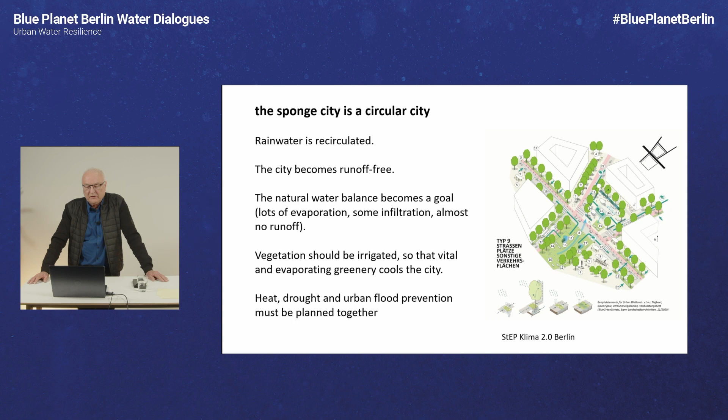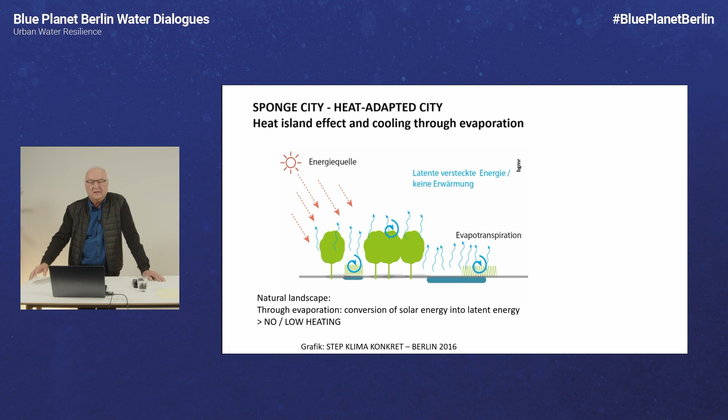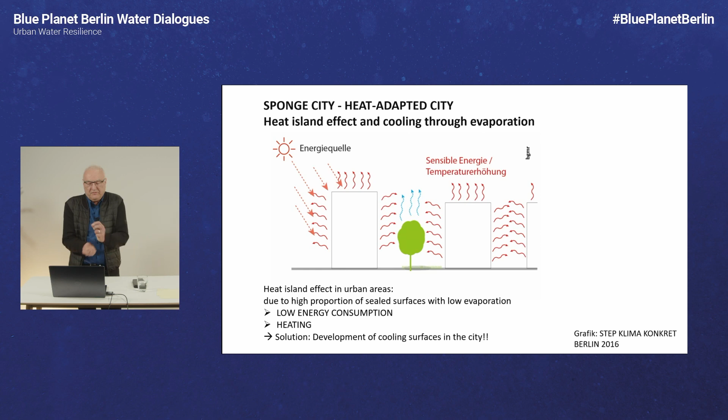Why? In the natural landscape, we have much evaporation. We have the conversion of solar energy into latent energy, and the result is low heating. But when we come to the cities, we have the heat island effects, and we have to cool through evaporation. Heat islands occur in areas with a high proportion of sealed surfaces with low evaporation, so we have to change it. How to change it?

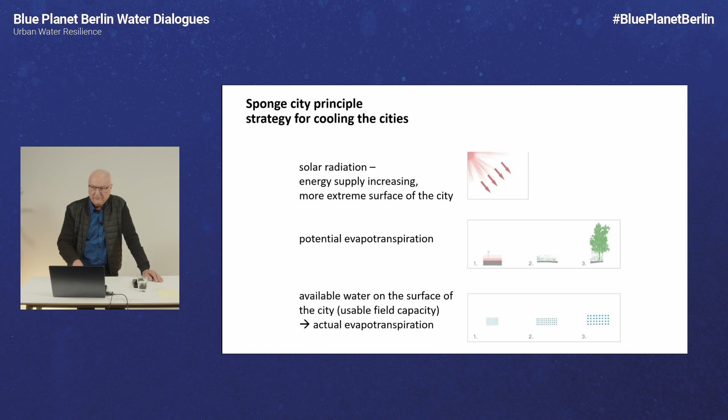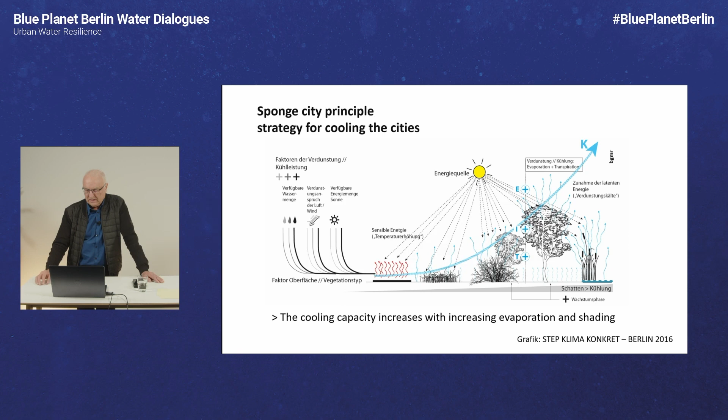The main strategy is evapotranspiration, but we need water to do this, especially in summer times. So we have to combine heat and water management. The cooling capacity increases with increasing evaporation and shading, and the nature-based solution is vegetation and water coming together, like this picture shows us.

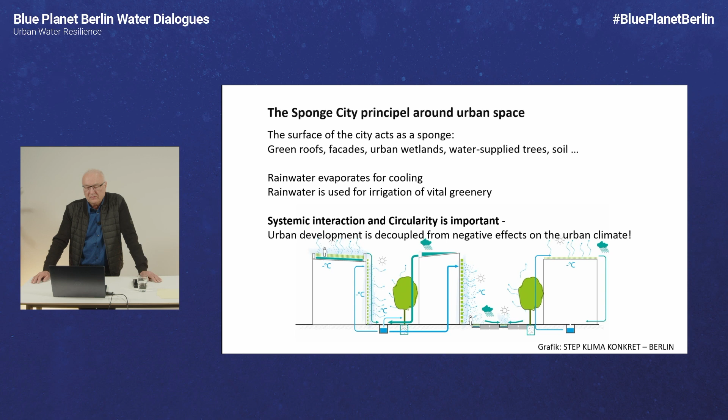urban cities. The sponge city principle for urban spaces is that the surface of the city acts as a sponge. Green roofs, facades, urban wetlands, water-supplied trees, soil. Rainwater evaporates for cooling. Rainwater is used for irrigation of vital greenery. This is a very systemic interaction and circularity, and this is very important to think about in this context.

Sponge cities, the challenge for Berlin. Berlin is a water-poor city. Precipitation is less than 600 millimeters a year. We have the river flow. When you look at other cities like Cologne, Dresden, Hamburg, Frankfurt, they have very high river flow. Berlin, only low.

This is a challenge for the city's water management because in Berlin we have a semi-closed water cycle. And the condition and quality of the water is very important for this cycle.

95% of the drinking water is produced in the urban areas of Berlin. Most of it is bank filtrate. The drinking water production and the wastewater disposal are in one area, in one water system. So we have to manage it together in a very closed connection, because we also have sewerage overflows in the city when we have rainy days like today.

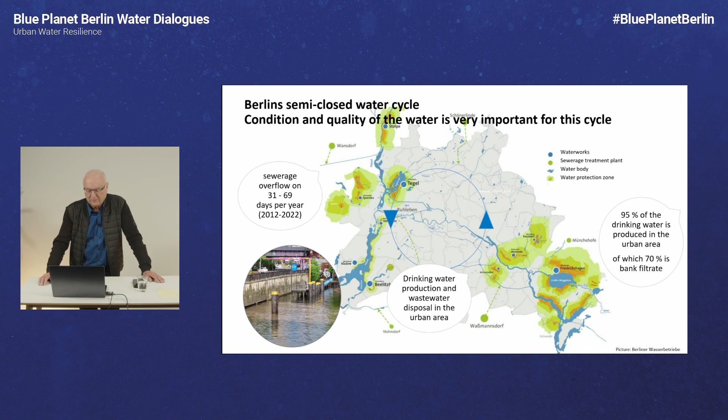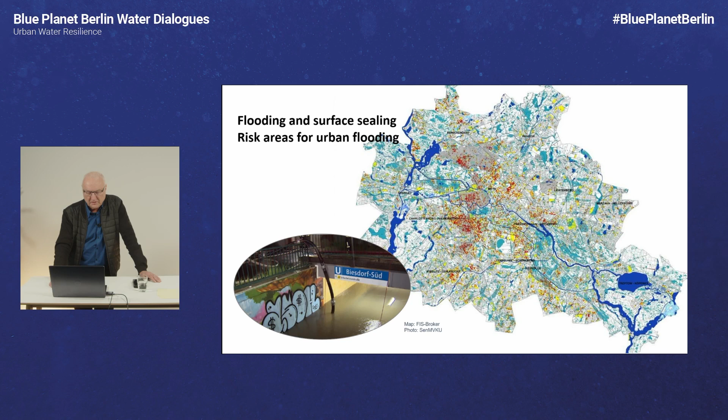So we have another job to do, we have another challenge: the flooding and surface sealing. We have risk areas for urban flooding all over the city, especially where many people are living. And we have infrastructure, like the picture shows us, with problems. So this is one side, too much water.

The other side is less water, with effects of drought and dryness. A good third of small water bodies, very important for biodiversity, have dried up in the last years. The trees need water, but they are damaged because of the drought and dryness. And the groundwater reservoirs are not fully replenished after the last drought years.

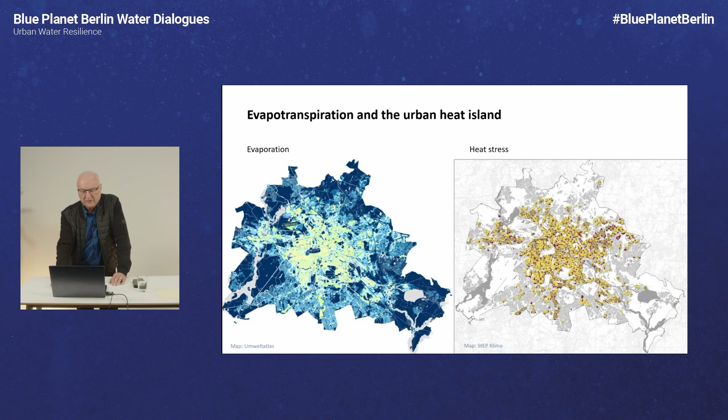In paragraph 54 is the definition of wastewater disposal. Wastewater is the water collected from precipitation from built-up and paved areas. And this is rainwater. But is rainwater wastewater? I think it's a resource for our cooling city, for the greeneries, for the drinking water.

And in paragraph 55, the principle of wastewater disposal: wastewater should be disposed of in such a way that the public good is not impaired. But rainwater is a scarce resource, we need it, so we have to change our thinking. In future, we are not urban drainage companies, we are resource managers of water. It's only a word, wastewater or resource water, but I think it's very important to discuss the meaning.

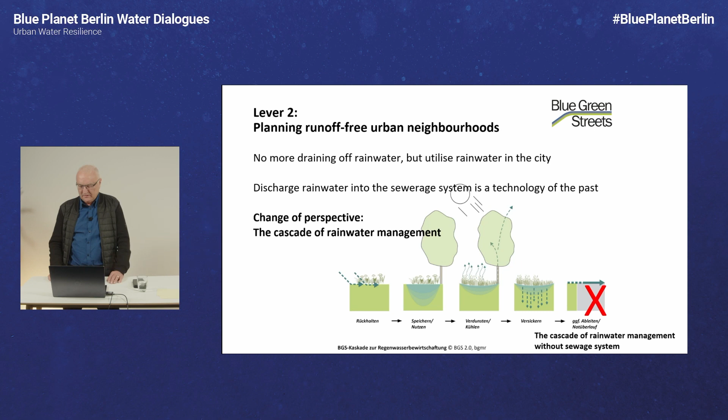Lever 3. Multi-coded use of the surface of the cities. Turn gray into green. Easy to say, difficult to do. I have Munich. On the left, you see the green space areas of Munich. In the middle, you see 13% of the city area is streets. And when we zoom in to the city center, we have an area with an outflow of 90%

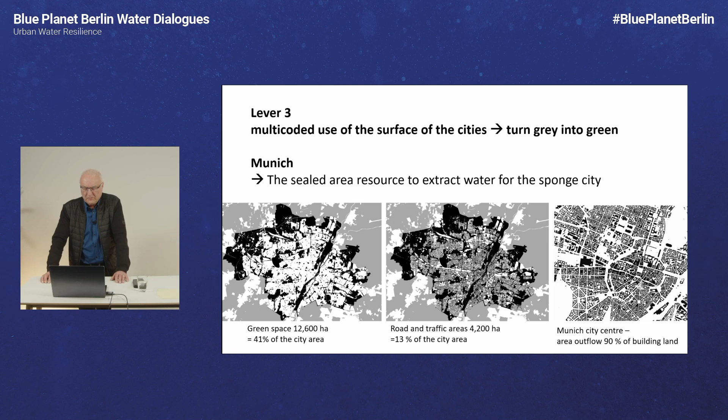of the buildings. And is the sealed area a resource to extract water for the sponge city? We have to think, is this a possibility for a new management? It's a resource, so we need some regulations to do this in a better way than in the last years.

This is the DIN in Germany, accommodation of cables and installations in public road spaces, a guideline for planning. We think we have to discuss these regulations, because I come with my trees, I come with my green water management, and I have to put it into the streets. So the regulations have to consider these new elements of rainwater management. We have to check the technical regulations and develop them further for the purposes of sponge cities.

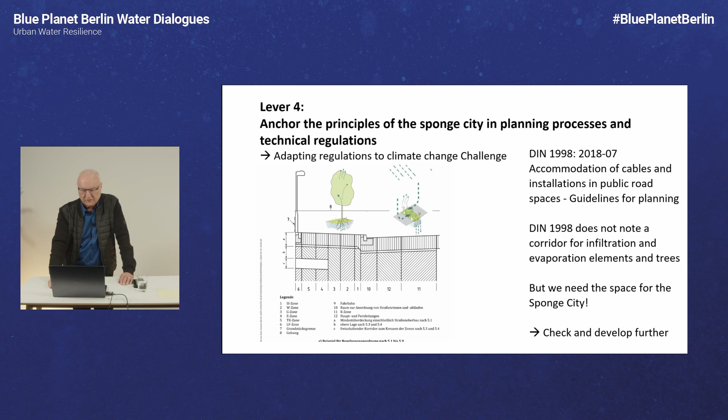This is from the research project Blue-Green Streets. We have a Blue-Green Street corridor. We need space for the water management, for the trees, for the sponge city elements. We have to formulate space requirements for the sponge city first. We have to develop specifications for urban development projects.

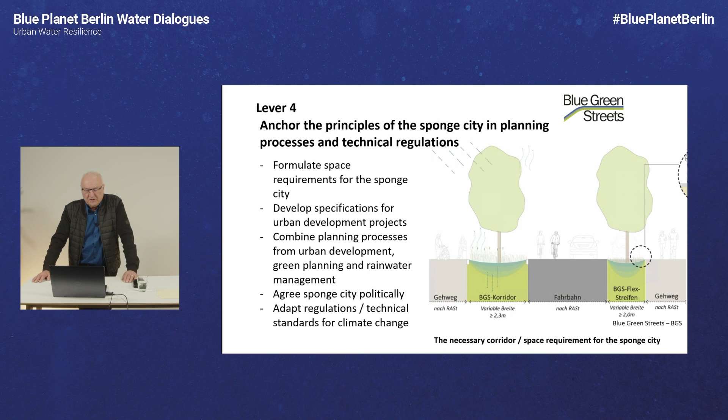We have a combined planning process from urban development, green planning, and rainwater management. This is not separated. We have to combine it. We have to agree on the sponge city politically, and we have to adapt regulation technical standards for climate change. So what will this mean? Adapt regulation technical standards for the climate adaptation.

One example: the regulation requires a distance between tree and cable and pipe installation. We have 2.50 meters from tree to the cables and pipes. In new streets, this regulation is normally possible. In existing streets, treeless streets are the result of this regulation, because we have no corridor of 5 or 6 meters for the trees in the streets of our cities. We need a game changer for this regulation to come together.

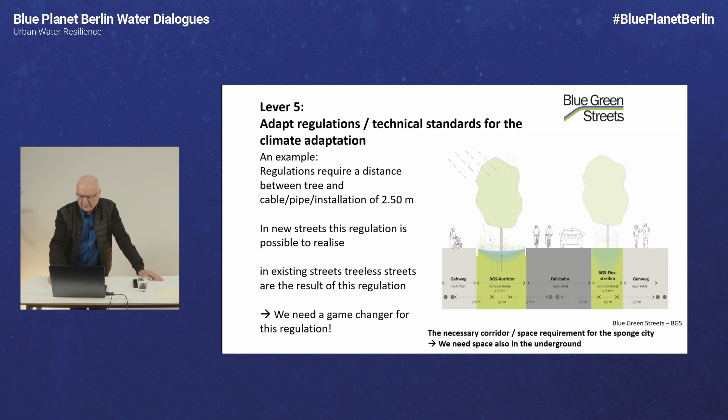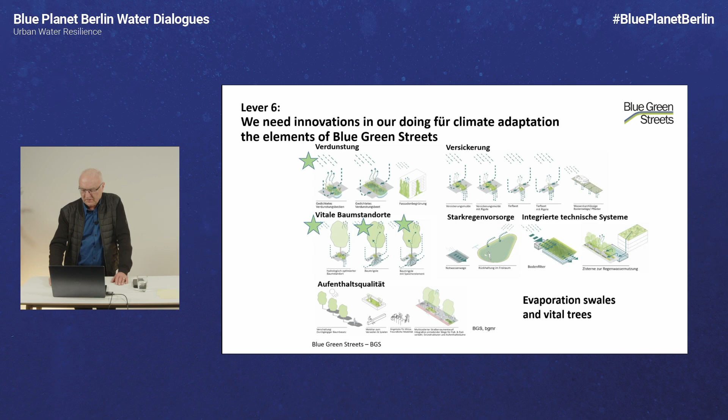We show it in the picture. So, we need innovation in our doings for climate adaptation. The elements of blue-green streets we have here in this picture, for example the evaporation swales and the tree trenches, Baumrigolen. They are a new element in our management of water and green together for the cooling in the sponge cities. So we need innovation for these new elements for the sponge cities.

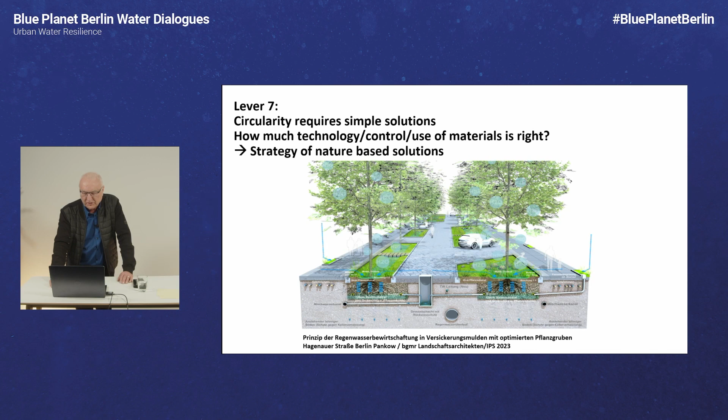But my first message was circularity. We have to think about circularity, how much technology, control, and use of materials is right. We maybe need a strategy of nature-based solutions. We have to think about it. How much technique, how much materials, how much controlling, how much nature.

The big levers for Sponge City Berlin. For the Sponge City of Berlin we also have goals, and one important lever is the limitation of rainwater discharge. I think this is a very important and very successful strategy. Since 2018, rainwater management must be ensured on the property. We have the management on the property, not into the sewage.

Since May 2021, we have the slogan, Mission Impossible, Mixing Impossible. The rainwater management is based on the natural water balance through evaporation, 70% in Berlin, and infiltration. No disposal into the sewerage system is allowed in new projects. And I think this is a very important lever for change, like a game changer in the water management for Berlin.

The second lever is promotion and financing. Decentralized retention measures are rewarded by a reduction in charges. For example, if you have a green roof, you pay 50 to 80% less. And so we have many different possibilities to pay less money when you are doing methods like this.

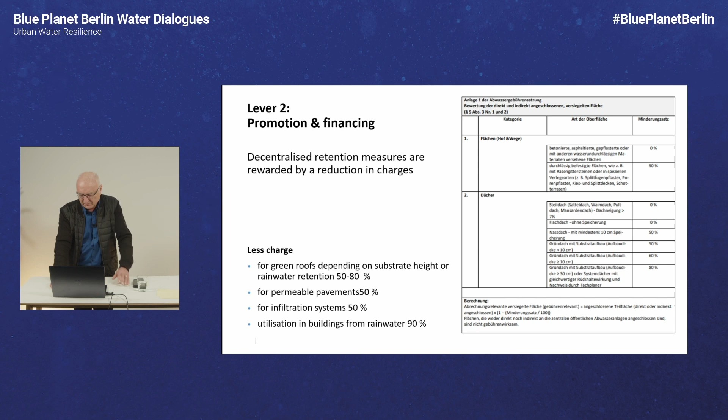Third lever: develop and coordinate concepts and objectives for new urban neighborhoods at an early stage across all disciplines. Important: early stage and across all disciplines. Because when town planning, water management, green, and traffic plan differently, then we have no possibility to multi-code the areas, the spaces in the cities. And this is an example for the Buckower Felder in Berlin.

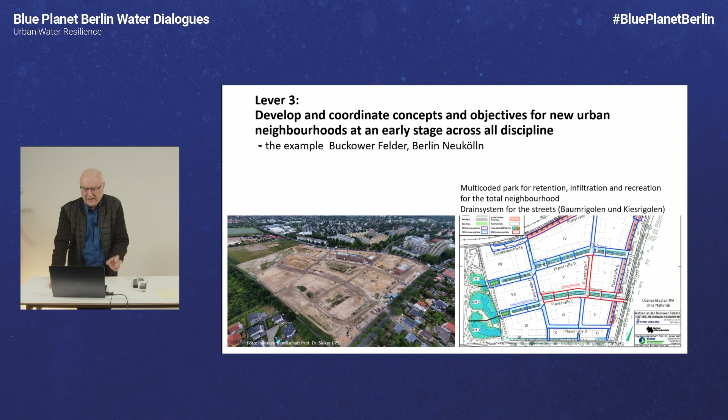We have a management for the whole new neighborhood; multi-coded parks for retention, infiltration, and recreation are one important part of this concept. The drain systems for the streets, tree trenches and gravel trenches, are very important for the greenery, also for the water management, and for cooling the city. So we need an early-stage, all-discipline strategy for such neighborhoods.

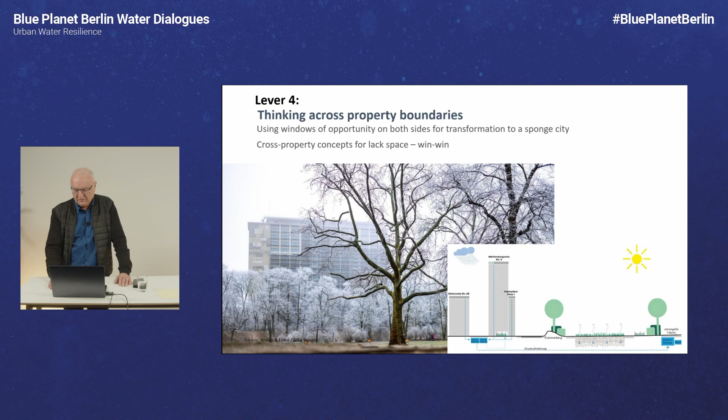And we have to think across property boundaries, because we sometimes have the opportunity to come together if we have a lack of space. We have possibilities for win-win situations. The housing area is very small and has very much water. Nearby is a park in Berlin. The park needs water, and so we have a strategy to combine the water from the building property with the green area. I think this is a good example to solve problems when we have less space.

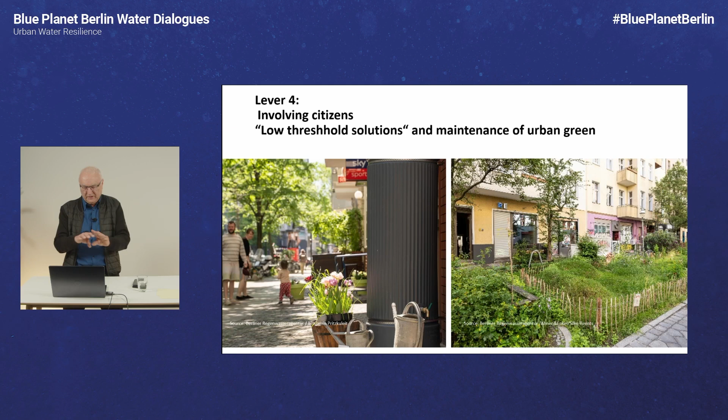And I think one important thing is we are planning for the inhabitants, for the children, for the older, for all in the city. And we have to involve the citizens. Low-threshold solutions and maintenance of urban gardens, urban green, I think this is a very important strategy for the future in the sponge city. We have big strategies, and we have very low-threshold solutions.

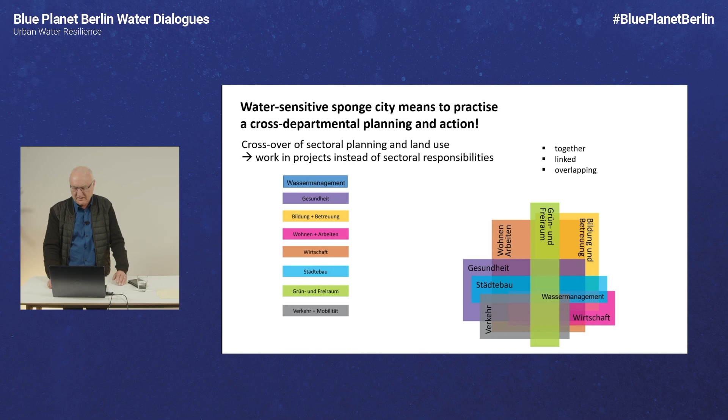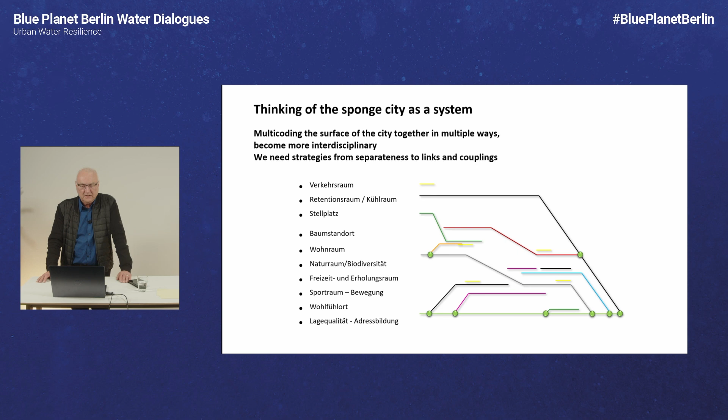This is very easy to say, but have you done water management, housing, economics, city development, green, traffic, come together in one project? And I think this is a very important new thinking of developing sponge cities. We want to multi-code the surface of the city in multiple ways, become more interdisciplinary. We need strategies from separateness to links and coupling.

So, what have we learned? Sponge cities are a systemic task. We have to work together. Political support is very important. We need clear guidelines for administrative action. A network approach to implementation is very important. Knowledge exchange, readjustment of responsibilities and planning processes, sponge intelligence,

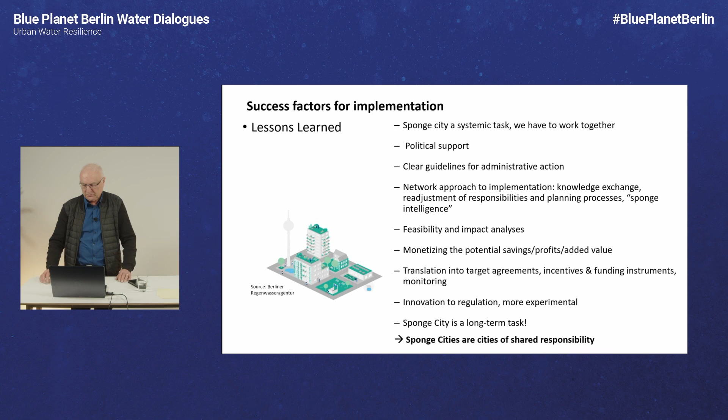feasibility and impact analysis, monetizing the potential savings, profits, added value. We have the translation into target agreements, incentives, funding instruments, monitoring, innovation in regulation, more experimental. The sponge city is, I think, very long-term. Sponge cities are cities of shared responsibility. Thank you very much and good luck for the future sponge city.

Thank you, Carlo. Thank you very much for your really great presentation. I especially liked the term cities as water resource managers. And when I look outside, I cannot believe that you were mentioning that Berlin is a dry city. Not today. It's really hard in November rain when we look outside.

I have a few questions about the presentation, if I may. Many cities are exploring their own ways to deal with extreme weather events, but also with the challenges of climate change you were mentioning. What new forms of collaboration are required to achieve the vision of sustainable and resilient cities?

Yes, I think very important is that we work together, interdisciplinary. We have to think in projects, not in sectoral Zuständigkeit, responsibility, separated. We have to think in one responsibility for one project, and the project is the sponge city, the new future of the cities, climate adapted cities. This is, I think,